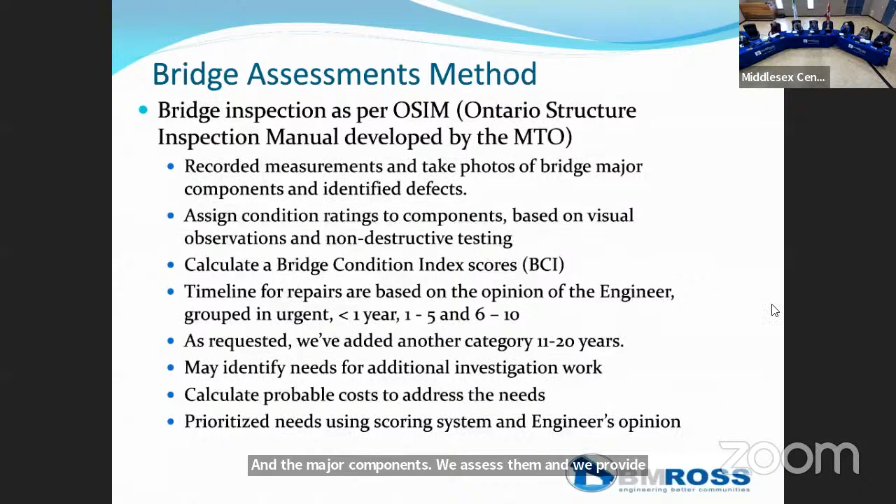So the bridge inspections, as per the OSIM manual, we record measurements and take photos of the bridges when we're in the field. We assess the major components and identify any defects that we see. We assign condition ratings to the components based on visual observation. We do not do destructive testing. If we see some concerns that we think may have to be addressed, we may recommend some additional investigation, and that may include some destructive testing, but as part of the OSIM, we're not doing destructive testing ourselves.

We calculate the bridge condition index scores, called BCI for short. It's just a statistical condition rating for the bridges. We also set a timeline for the repairs, and based on the opinion of the engineer, we may say some repairs are urgent and should be completed right away. It could be a 1 year timeline, 1 to 5, or 6 to 10, which is usually what's included on the OSIM form. But as requested from your municipality, you've asked us to flag things coming in the future, so we also provided comments on things we anticipate might be required in the 11 to 20 year time period.

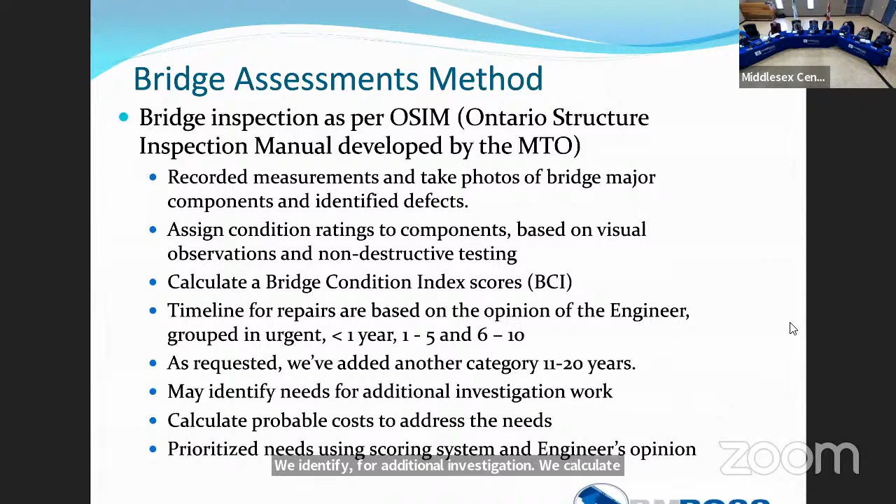We identify needs for additional investigation, as mentioned earlier. We calculate probable costs for the repair needs, and then we prioritize the needs using a scoring system based on the engineer's opinion.

So the performance grade is where we take a look at the bridge and ask, is this bridge suitable for its application? Say if the bridge is a culvert that's really narrow on a busy road with a lot of traffic, you might give it a lower score because it's not really up to the standard you'd like for that site.

Similarly, you might have a bridge with a load limit, so that one's not suitable for its intended design purpose. Or it could be a bridge that's really narrow, say 6.2 meters wide and you're trying to put 2 lanes, so it's really tight. Those bridges, you probably don't want them. You'd like to fix them up sooner and maybe consider replacing them. So we penalize them a little bit in our scoring system.

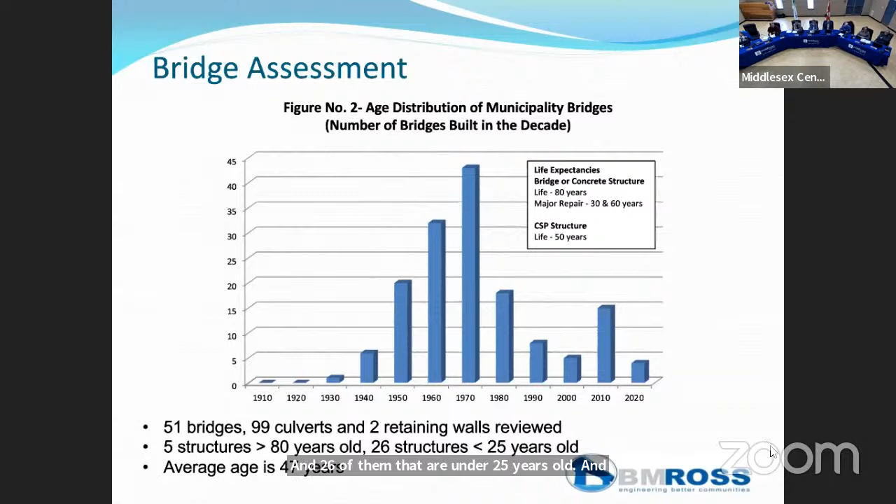Just a little bit of additional information. One thing we pointed out in the report is that if you look at your bridges, the average score for them was 67.5. With the culverts that were over 3 meters, the average score was 64. But with the culverts we were asked to assess that are under 3 meters, the average score was 50. So there's a cluster of those, as I explained earlier, additional ones we reviewed that are in poor condition. When we get to the recommendations, some of them pertain to addressing that issue with those smaller culverts. Next slide, please.

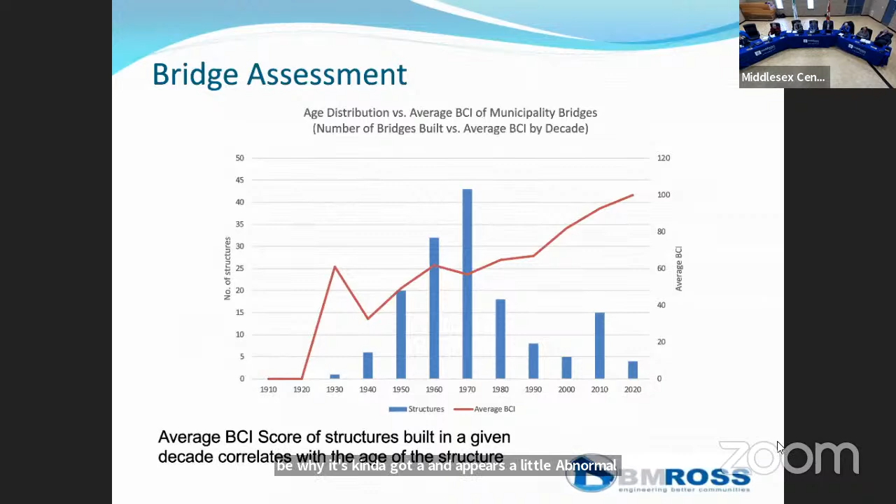You can see the number of structures and the average BCIs within those decades. You'll notice that bridges that are really new have a really high BCI, and as you work your way to the left in the graph, as they get older, the conditions generally go down. There's one in 1930 that could possibly have had a rehabilitation done, which may have brought its BCI number or condition back up, and that may be why it appears a little abnormal in the graph. But that can happen because bridge conditions are based on their condition, not necessarily their age.

So going through, we look for some things and try to point them out if we identify them in the field, and we have in the individual bridge reports that we provide to staff. These are some of the things that we might identify on the individual reports, but it's also provided in our overall report as a general recommendation to staff to keep in mind for routine maintenance.

It includes things like cleaning the bearing seats - that's on the abutments that hold up the end of the bridge deck. The bearing seat is where the girder sits, and if debris and water accumulate in that area, the bottom of that girder tends to deteriorate. The girders under your bridge deck are a key component and an expensive component, because if you have to repair them, sometimes you have to do things like jacking up the end of the deck.

So cleaning that area out, and pressure washing expansion joint seals to check for leaks. That expansion joint seal is right above that bearing seat, and it allows for expansion and contraction of the bridge deck. But over time those seals start to wear, and moisture can get down through there and cause deterioration of your girders.

We recommend cleaning gravel off the curbs and the deck, because the gravel accumulates and moisture will build up and cause the concrete to deteriorate. We recommend resealing joints in the walls with caulking, removing brush and logs that might block up your culverts - sometimes trees float down and plug the end of the culverts. Restore eroded stream banks with riprap or similar material to protect the slopes from eroding. Grade the shoulders to help ensure water is shedding off in advance of the bridges, and minor guide rail, parapet wall, or handrail repairs might be identified. There are other things to keep an eye on.

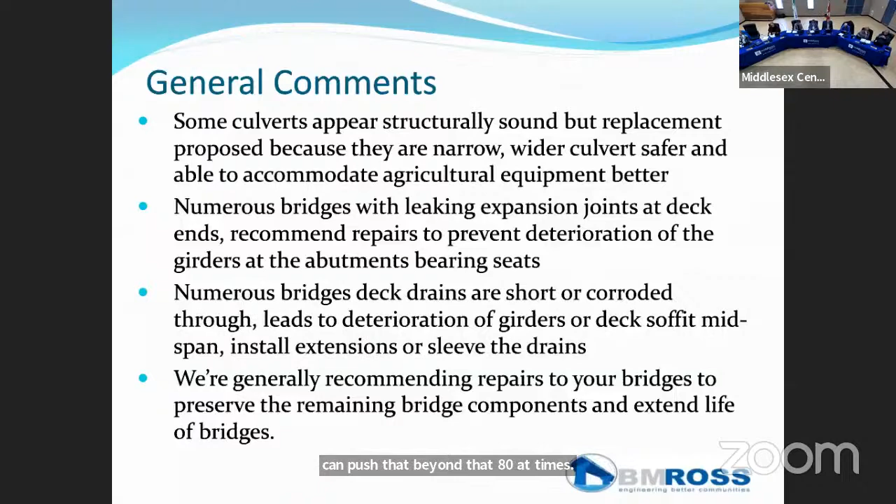So, major repairs or replacement needs - there's a combination of engineering judgment and timelines used with the OSIM reports and the theoretical scoring to help prioritize that work. There are needs to address safety concerns and preventative maintenance, as mentioned, and those will be prioritized. Sometimes other options are chosen, like temporary repairs to delay repairs.

Sometimes you might decide that a bridge is ultimately going to be replaced. So although there's a need and some repairs there, we might recommend you do nothing for a little while and plan for a replacement in the not too distant future. Or eventually, another option is a bridge you decide you're going to close, and you just let it continue until it's time to close the structure.

Probable cost and assumed repair costs and replacement needs are calculated based on 2023 costs. So when looking at work you may have to do in the future, you should inflate accordingly. Unfortunately, one of the things we found in the last year going through costing is there's been quite an increase in construction costs in the last few years, not only with bridge repair work but with road work and everything. So it increases your repair cost and replacement value of all your bridges.

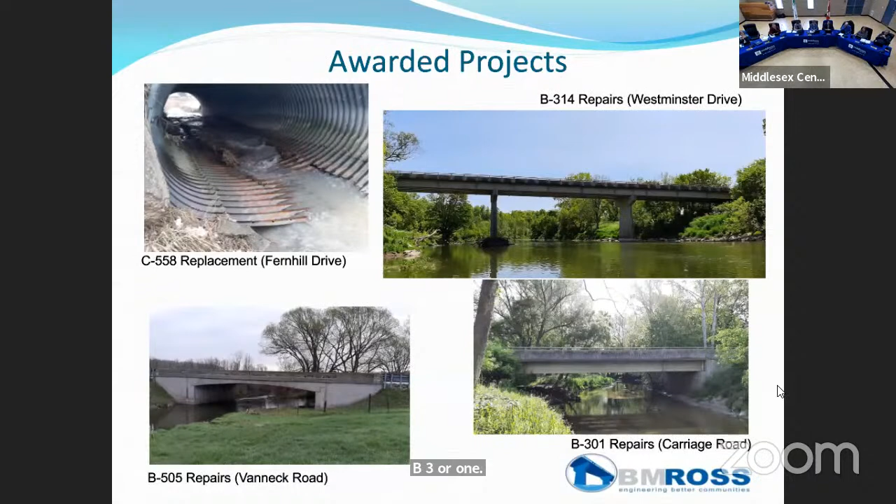This structure is the B108 Medway Road structure, and the scope of work is a little different. We're proposing not just repairing it, but converting the end of the abutment to a semi-integral abutment. Most bridges have an expansion joint seal at the end of the deck, but with a semi-integral abutment you remove that joint, extend the deck, and hook it over the top of the abutment. The expansion and contraction takes place behind the abutment, pushing against the gravel and asphalt. You saw cut the asphalt, but you've eliminated that joint entirely—it just pushes the asphalt and gravel back a little bit.

At one time they figured you had to have that expansion and contraction joint. But over time they found that even though it expands and contracts against the gravel, the noticeable impact on the road is minimal. You might get a little cracking in the asphalt requiring repair, but by eliminating the expansion joint, you no longer have water coming down onto the girders and bearing seat at the end of the bridge, which eliminates the need for subsequent repairs. So with this structure, we're converting it to a semi-integral abutment bridge.

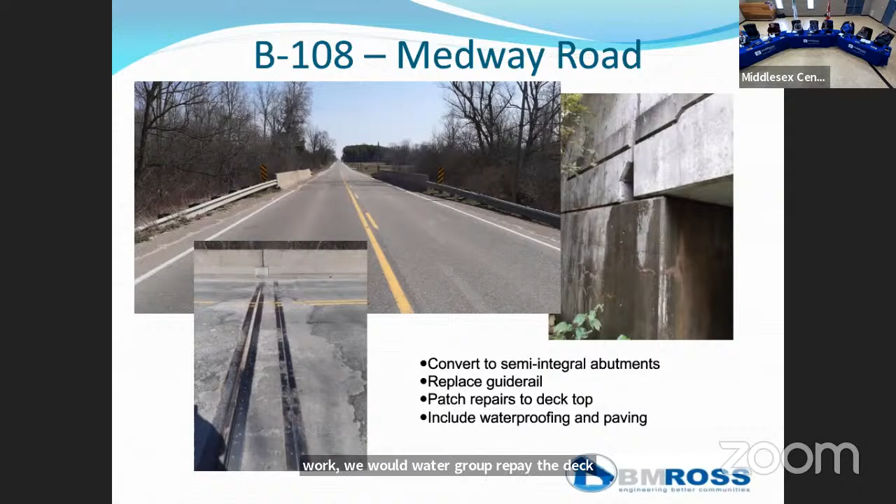This structure, B120, is on 9 Mile Road. Similarly, we're looking at converting it to a semi-integral abutment bridge, replacing the curbs and railings, doing patch repairs on the bridge deck, replacing the guide rail on the approach—the guide rails drop down on the approaches there too—and waterproofing and paving the deck.

The photos show concrete deterioration taking place on the curb and right around that joint, which allows moisture to penetrate down in. The railings are aluminum, but they're a little lower than what you'd normally see to comply with current standards. So while we're doing all this other work, it's an opportunity to bring it up to current standards and replace the railings.

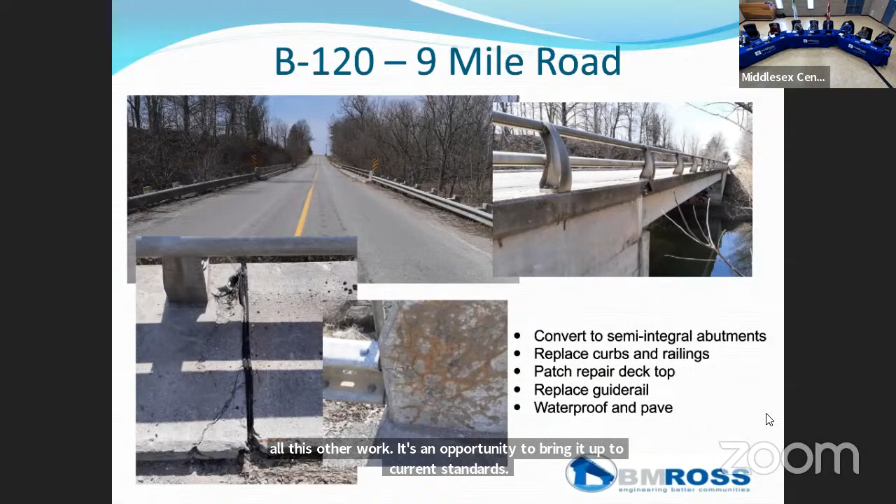The structure C580 is one of the new ones identified for us to review. It's on New Ontario Road, a shorter structure with only a 1.8 meter or 6 foot span. But one of the abutments is out of plumb—the bottom is in, and you can see it's on about a 4-inch slope from the bottom to the top. The concern is that over time it could kick right in, so it's recommended for replacement. This is actually the one we suggest putting a load limit on, just until we can get it replaced.

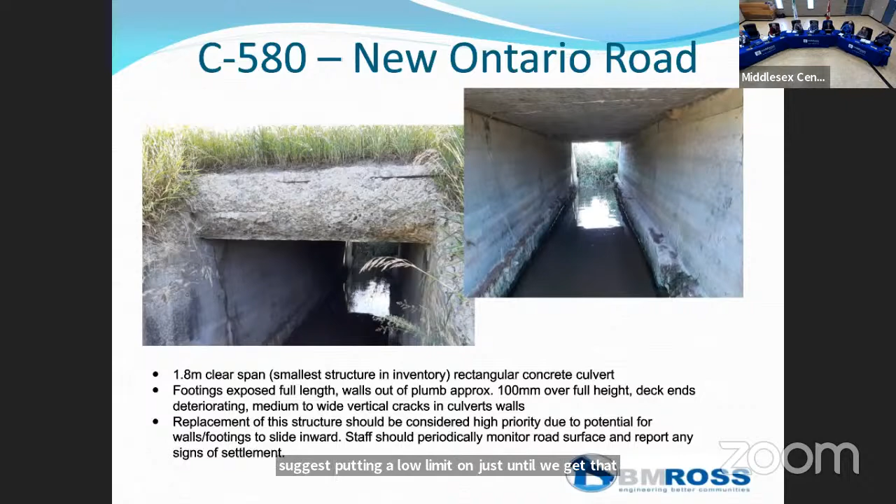This is a Coldstream Road structure. With this one, we're just planning to replace the seals on the end of the bridge instead of doing a semi-integral abutment. The plan was to replace the seals on the end, patch repair the bearing pedestals and girders, replace the deck drains, patch repair the deck top, waterproof and pave.

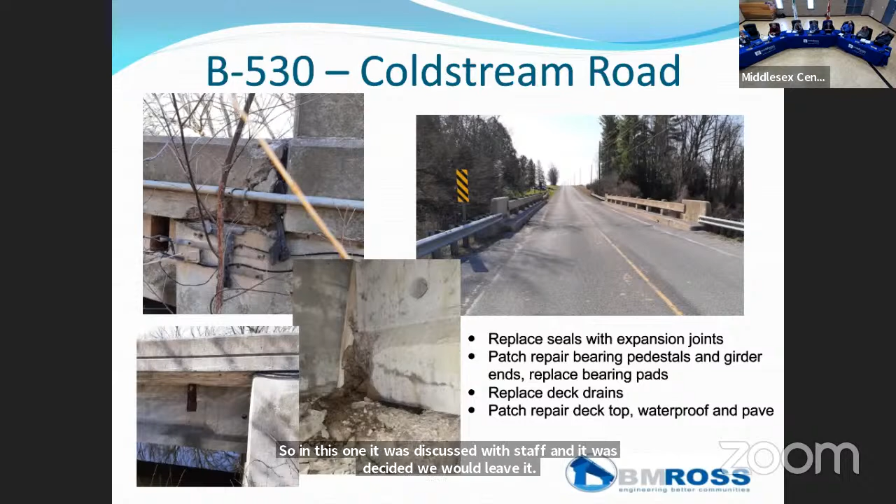One of the reasons I'm trying to remember why we made that decision with this one, just to replace the seals - it could be that it's an older bridge. If you're going to spend a little extra to do that conversion to semi-integral abutment, you'd rather do that on a newer bridge that you anticipate having a lot more life with. But if the bridge is already 60 years old or something like that, you're like, let's repair it and seal it. It should certainly get to the end of its anticipated life, but it usually costs a little more to do that conversion. So in this one, it was discussed with staff and it was decided we would leave it and repair it, keeping the same style of joint at the end.

Okay, next slide. This is photos of one of the structures, C-156 on 13 Mile Road. The top photo shows what it looked like in 2021. The photos on the bottom show it in 2023, so it's continuing to deteriorate. It's one of those shorter span structures that we're recommending for replacement, and it's a shorter span structure but also a narrower structure, so that's why we're recommending replacement.

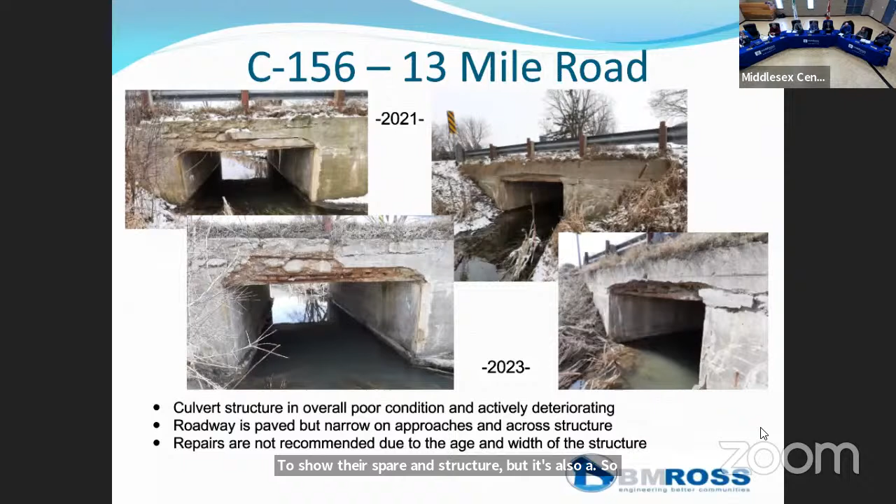Okay, next. This one's C-572, it's on Ivan Drive. The culvert structure is overall in poor condition. Actually, this is the one that we recommended a load limit on in May. The deterioration rate is likely going to increase because you can see along the bottom edge that there's an opening, and water flow can come and encourage the deterioration, pulling out gravel or concrete between that joint down there.

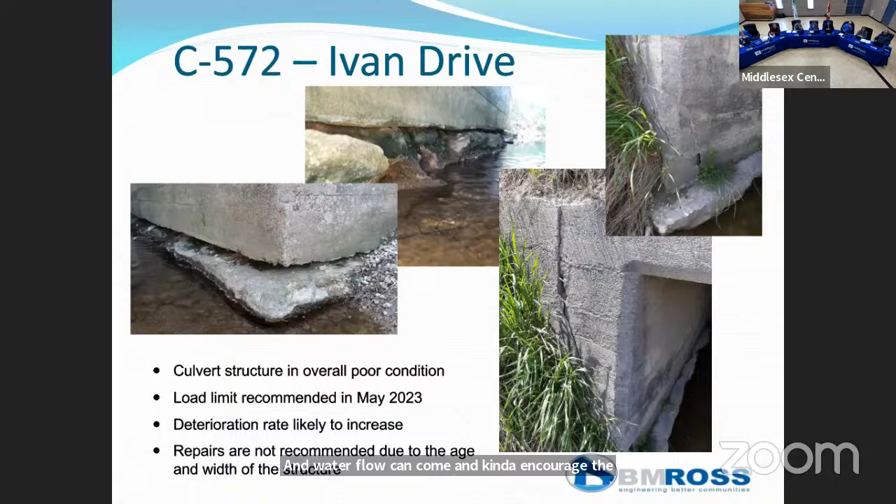Now, staff asked us to provide some comments on cost reducing possibilities. They mentioned that there might be interest to have some of your staff do some of the work. So in conjunction with that, we were discussing possible methods and what you might realistically be able to expect with trying to implement that approach.

The first thing we've got is combining like projects or geographically close projects into one contract. It has the potential to save some construction costs, and we found that's been effective at different times where if you've got two bridges in close proximity, you put them together as one contract. The only caution is don't get too carried away - don't try to put like 6 bridges together, because a lot of contractors that might otherwise bid on it will look at it and say that's too big a project, I don't want to tackle that. So you have to pick and choose, and try to get it in a sweet spot, some economies of scale into a range where contractors will still be interested and want to bid on the project.

The next option listed is pre-purchasing of corrugated steel pipes or concrete box culverts. Alternatively, it could be providing access to municipal pits, or municipal staff hauling some of the soils or granulars to the project. You're kind of taking the cost that the contractor would have to spend, and you've got your staff doing some of that work. If they're available, that could be an option - there's potential for reducing some of the costs with that.

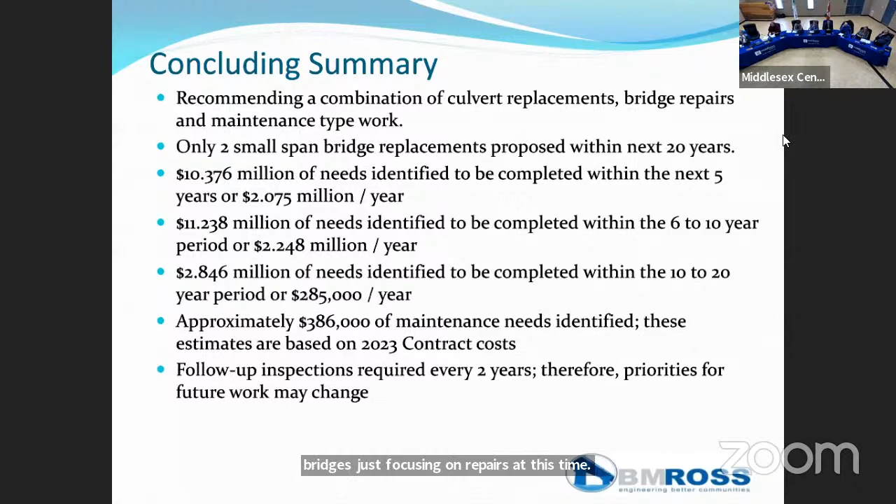Concluding summary: we've recommended a combination of culvert and bridge repairs and maintenance work identified within the assessment. There's only 2 small span bridge replacements proposed within the next 20 years, so most of your larger bridges are just focusing on repairs at this time. There's 10.4 million of needs identified to be completed within the next 5 years - that works out to $2 million per year. And there's 11.2 million of needs identified to be completed in the 6 to 10 year range, which again works out to just over $2 million per year.

2.8 million of needs are identified to be completed in the 10 to 20 year period, which works out to be a smaller number during that time period. But keep in mind, that's trying to identify things 10 to 20 years in the future, so other things might come up.

Also being realistic, some of the things that you hope to complete within that first 10-year period sometimes get delayed and pushed back into that 11 to 20 years. Sometimes that happens.

So there's approximately 386,000 of maintenance needs that were identified. These are estimates based on, say, if you were to hire a contractor to do the work, but it's often completed by your own staff. So we just need a place to put a number in there, based on what we think it would cost if you hired somebody else to do that.

And the last point there is a follow-up inspection is required every 2 years, and therefore priorities for future work may change when you're doing subsequent inspections. You might find a need to adjust the priorities. And I think that concludes the presentation that I prepared.